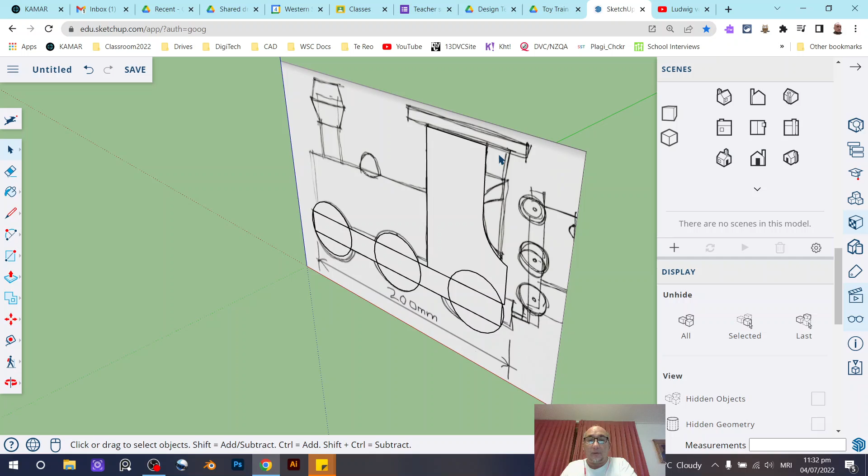Now we've got this part, and we want to draw a nice little circle in the middle here. Let's do that nice and quickly. Let's see, that looks pretty good. A nice round number, radius 20, that's going to be a little bit skinny on the front there. So let's try 15. Yeah, that looks pretty good.

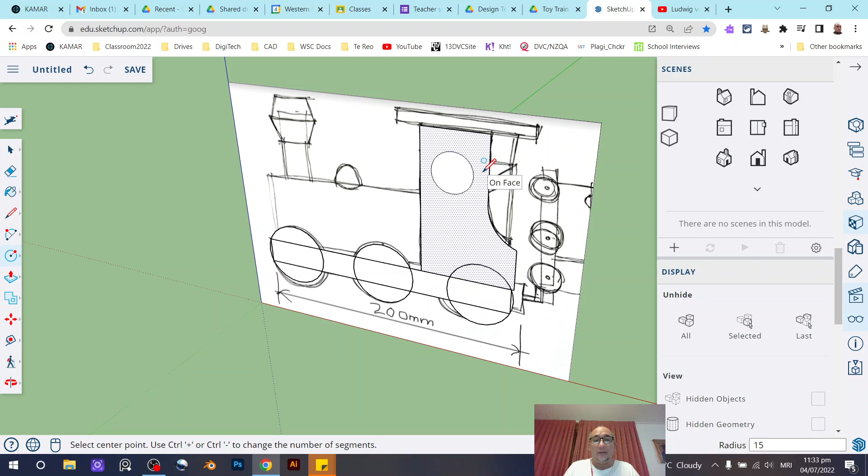We can delete that center. And now we're going to select all of that and make it a group, because we want to use it as a group later on.

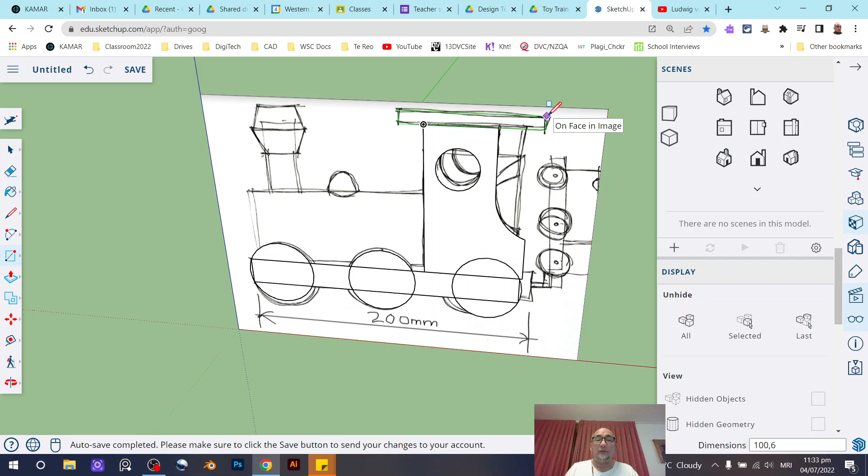And then we've got the roof part here. Again, just draw a rectangle, so I'll start from there, draw this in. And again, we want to look at the sizes there. That looks like it should be about 100. And the thickness of the material, I happen to know that we've got lots of 6mm ply, so we're just going to go 100 by 6. So there we go, there's my roof part.

Now, this big cylinder, we're going to ignore that for now. So we're not going to draw that part now, we're going to do that later on. So let's see.

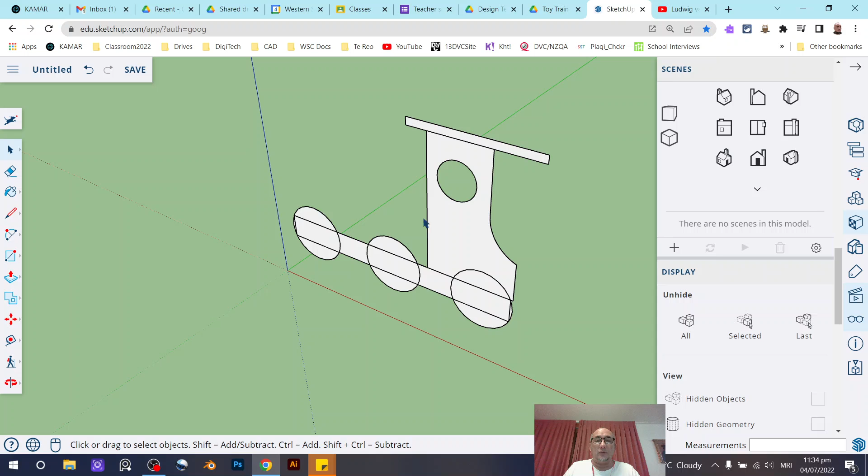I think we're about ready to start moving into the third dimension. So for now, I'm going to just hide my drawing. I'll be able to bring it back later on. In fact, let me show you how to do that.

So I've hidden that thing. I've gone to my display tab, and I'm going to unhide all. And then again, right click on it, hide. Good, so now we've got just a two-dimensional thing. That's not very satisfactory so far. What we want to do is make it into a three-dimensional object.

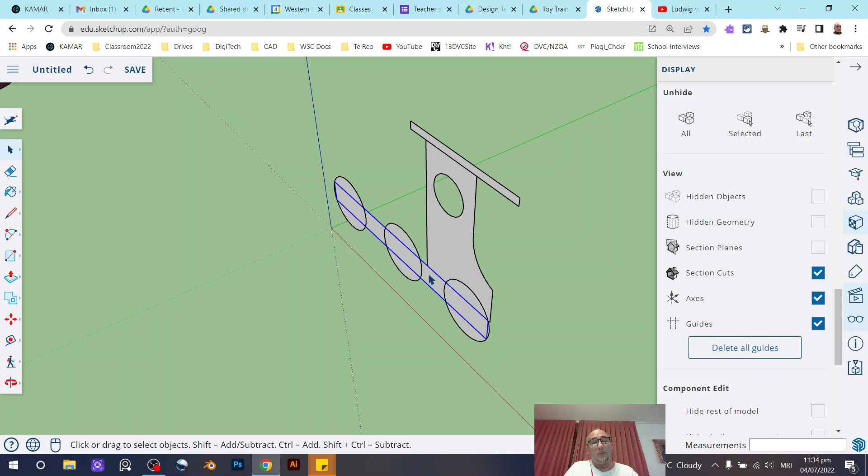So let's see, we're going to take this part here, we're going to try and extrude it. Now you'll notice that it doesn't extrude, and that's because we've made a group and we can't edit the group from the main view. We've got to double click on it to go inside of that group, and from there we can now drag this out. And so now, how thick do we want it to be?

Not too wide, I don't think. Let's try 70 mils, that's the distance that we want to extrude that by. So there we go, so there's our base.

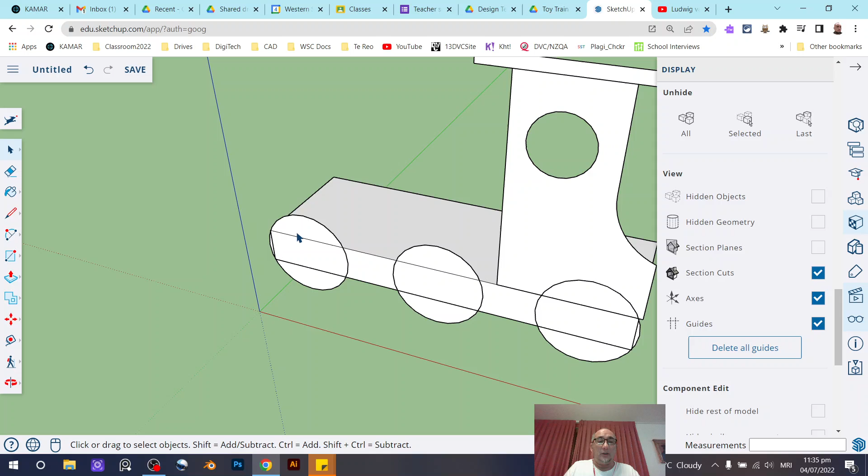That looks pretty good. Now we want our wheels, so we'll get our wheels again, double click on them to go inside them, and then we can extrude these out. I think we'll do, let's say, 20 mils for that.

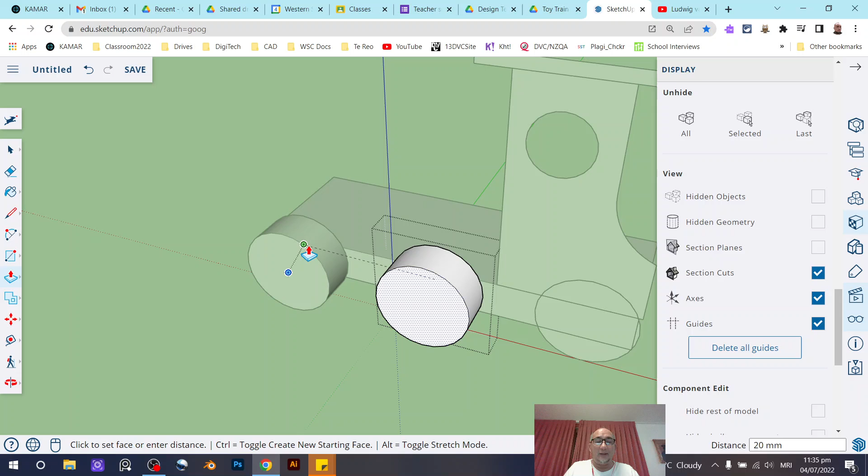And then we'll go to the next one, and we'll do the same thing. Now this time we don't have to type in our number, because we can just snap to the edge of my other wheel and say, look, I want it to be the same thickness as that previous one. And so again, same thing here. Click on it, snap it out to the same distance.

Right, so now we want to give the wheels a little bit of extra interest. So let's create a piece that sort of pushes in, so we've got a bit more kind of interest in the wheels.

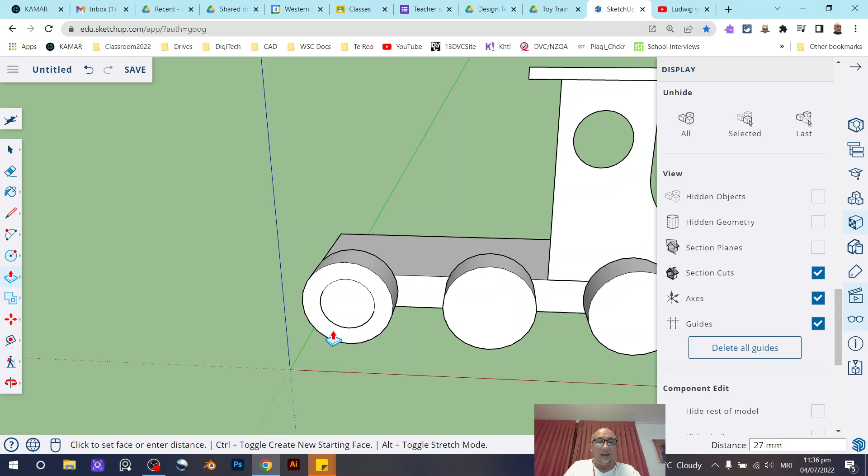So let's see, we're going to start and create another circle, and let's see the time, we're getting low on time, but that's okay. I'm going to draw my circle and push it in. Now notice that when I do that, it does something weird. It doesn't actually properly go in, and that is because I created a circle, but it wasn't inside of the group.

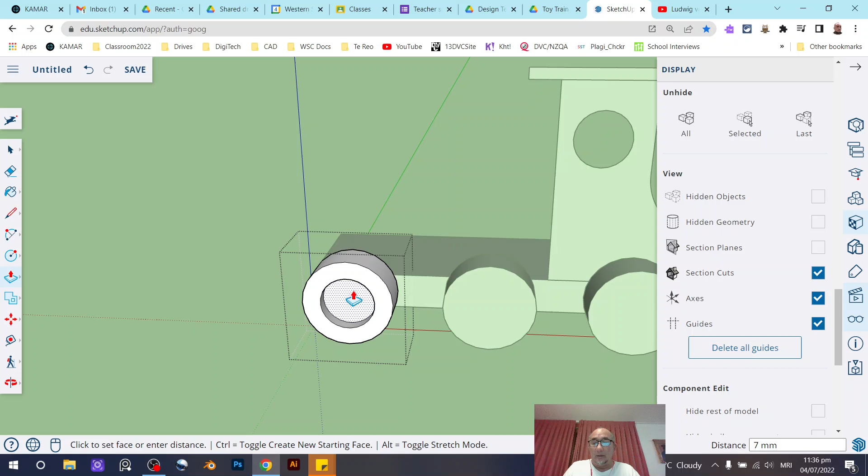So I'm going to create the circle again, hover over the edge, and then I can go to the center. Radius 15, that looks pretty good. And then we'll push it in again by, let's say, well that's 7. Oh, I'm going to go 5, I'm going to push it in by 5. So there's another wheel, and now we'll do the next wheel.